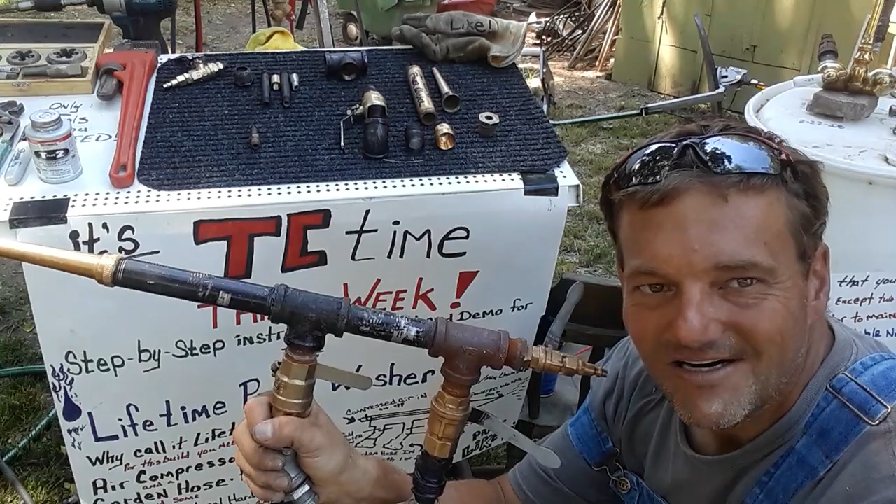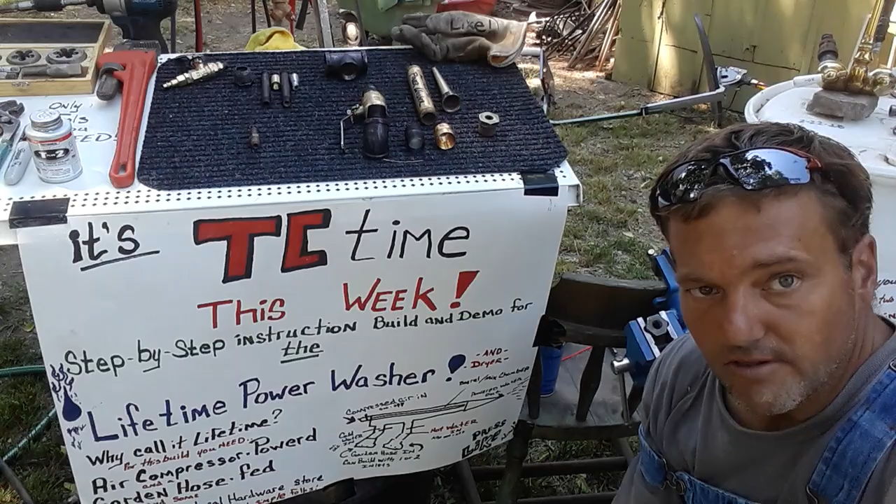Last week, you guys got to see me do a demonstration and a brief description of the build of the power washer that I've made. It works off an air compressor. Well, I decided this was a little bit too complicated for just anybody to want. It's kind of heavy. So I went back, I've stepped it back just a little bit, and this time I'm giving you a step-by-step, detailed instruction on how to build this thing. Step by step. It's going to go quick. I'm not going to do a lot of talking.

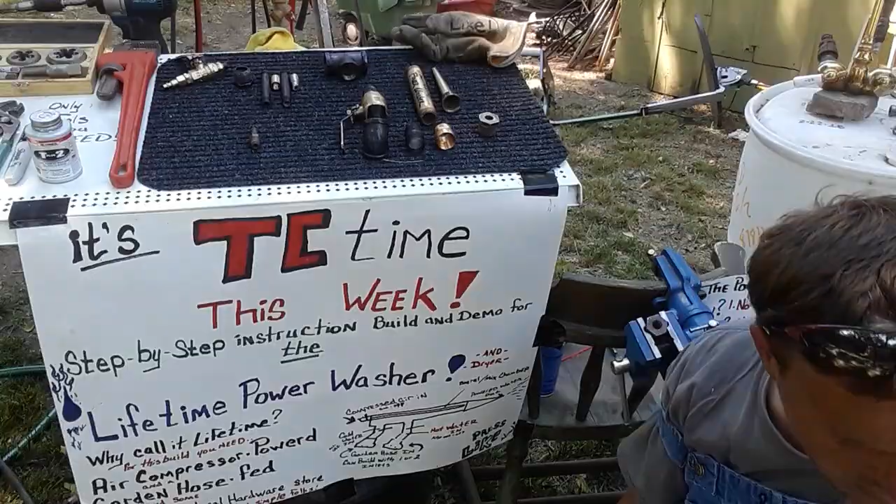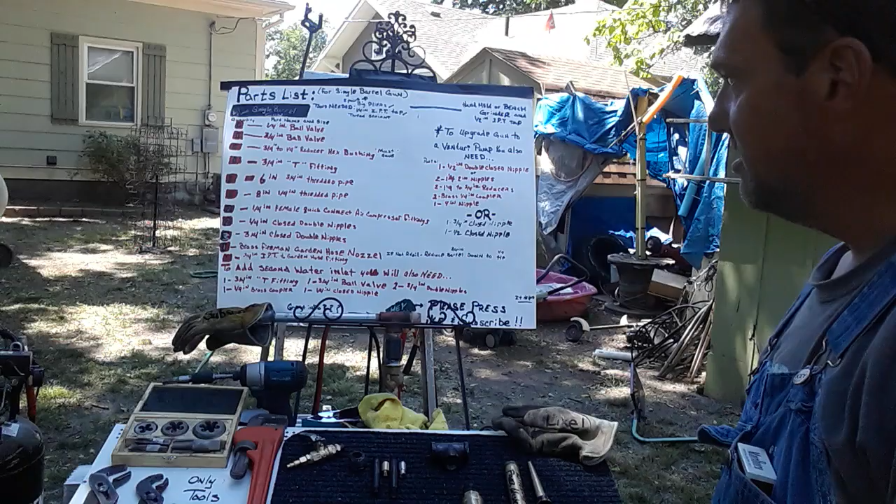Alright, as you see, I've made a parts list. As we put things together, we're going to go ahead and check them off the parts list. This is everything that you need, this side of the paper, to build the power washer. Alright, let's get started. It says first thing I need is a 1/4 inch ball valve. I have a 1/4 inch ball valve right here.

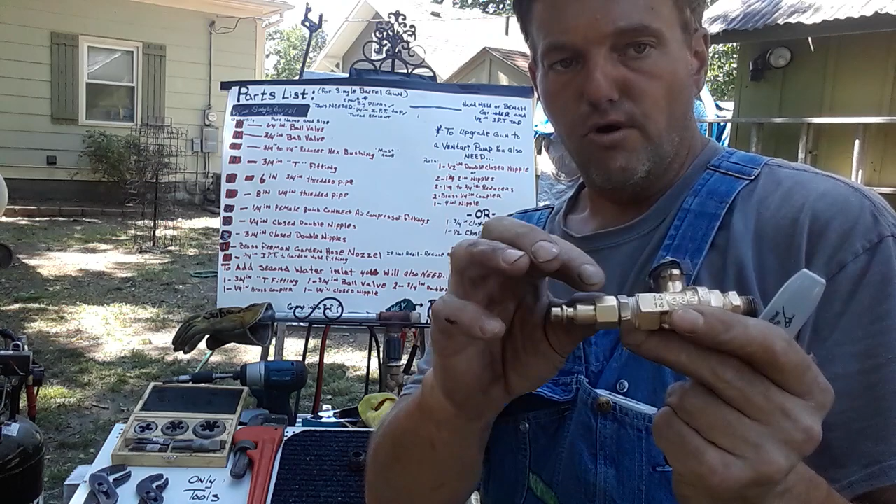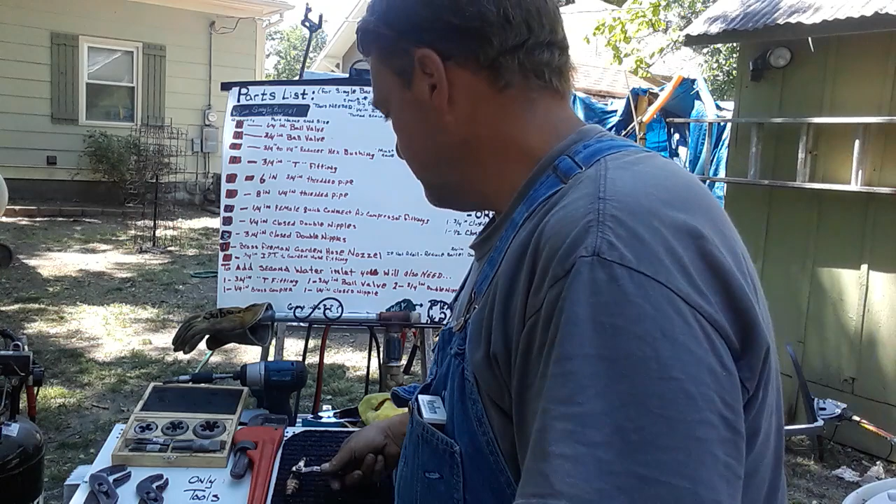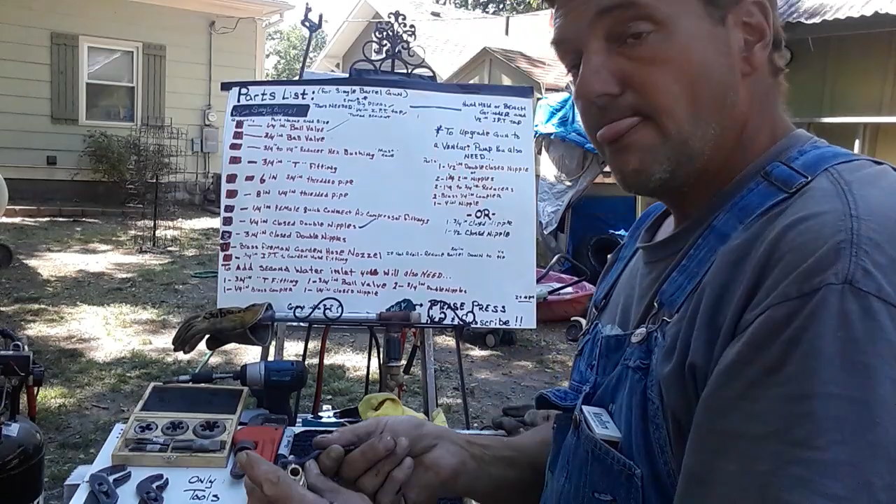I went ahead and screwed in my two 1/4 inch fittings to each side, my 1/4 inch double nipples, so I could screw on an air chuck and screw it into my gun. So let's go ahead and check off all that. There's my 1/4 inch ball valve. Closed double nipples. And that's it. Alright. So we have that. That's going to be how you get your air to your gun.

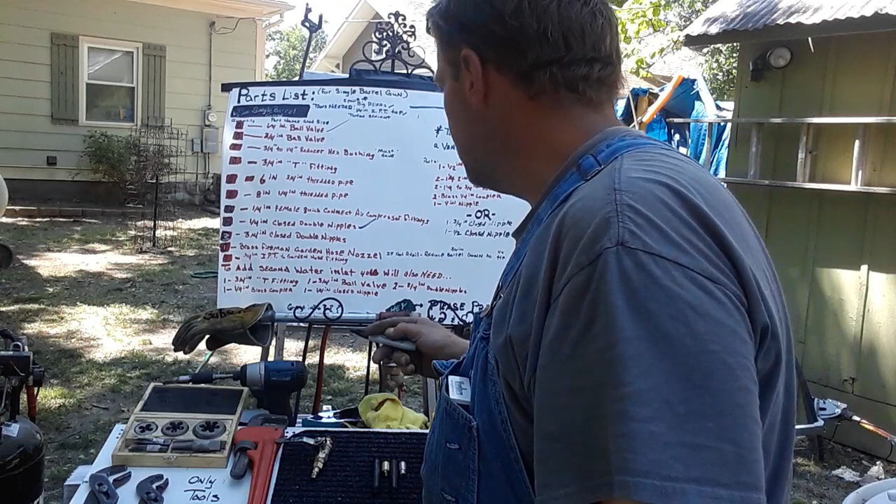The next thing that we're going to need is a 3/4 inch to 1/4 inch hex bushing. This is what it looks like right here. Okay, let's go ahead and check that off the list. Right here. This is a must-have. If you don't have this, you can't make the gun.

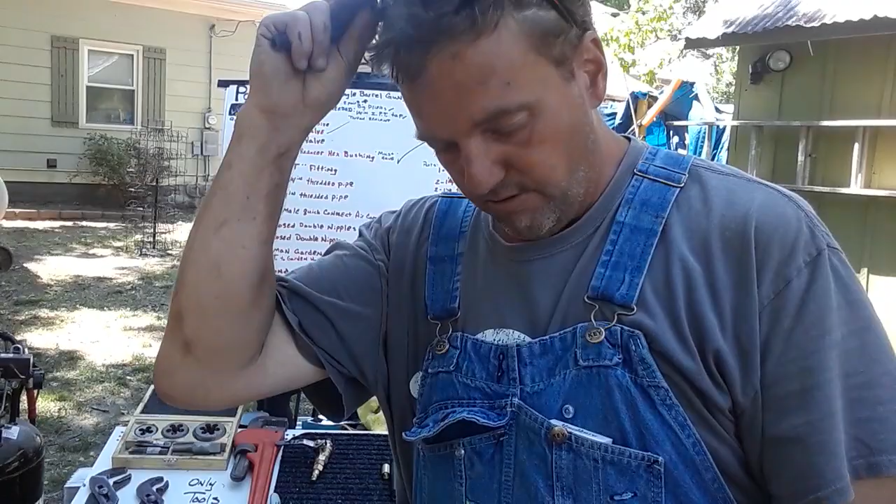All right. Now then, if you don't have a tap set already, you can go to the parts store, pick you up one of these 3/4 inch hex fittings and a 1/4 inch nipple. If you'll go through the bin, you can usually find one that'll reverse thread. Just screw it in backwards. So anyways, if you can find one that'll reverse thread in, great. If not, then what you'll have to do is

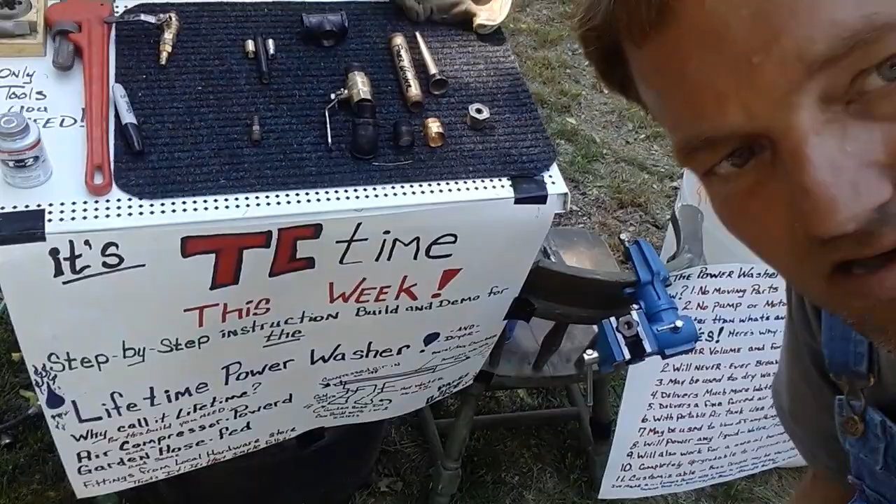Harbor Freight sells a 1/4 inch tap. By the way, this is a size 13 socket. I don't have a tap wrench, but this works great. And all I do is I'll start my tap in by hand to make sure that my threads are going to be straight. Once I get that in as far as I can get it by hand,

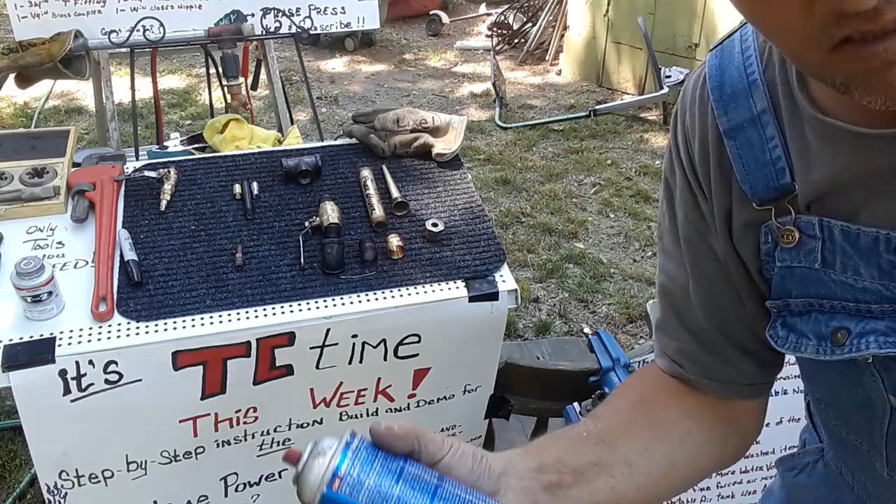take some of this cutting oil. Harbor Freight sells it also. It's kind of expensive, but it's worth it. Spray it on there. Connect your tool. Press the button. Okay, till it stops, then you back it out. Take it out of the vise. You don't have to go all the way through, you just have to get it to where it'll start.

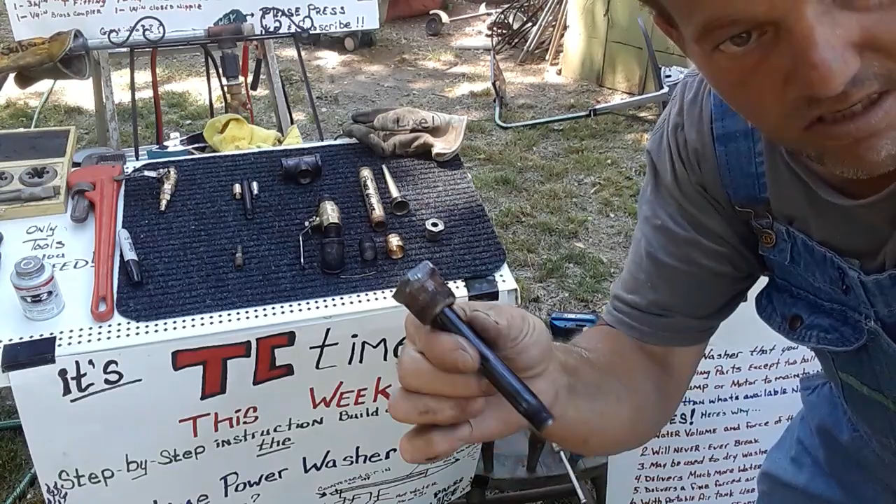If you have a tapered thread fitting on your hex bushing, this is usually all you have to do. And it starts the thread right in. Bam! Okay? So anyways, this isn't how it's supposed to go in there. It's going in there the opposite way that it was designed to go in there. So that's what the hex bushing is for, and I'm about to tell you why.

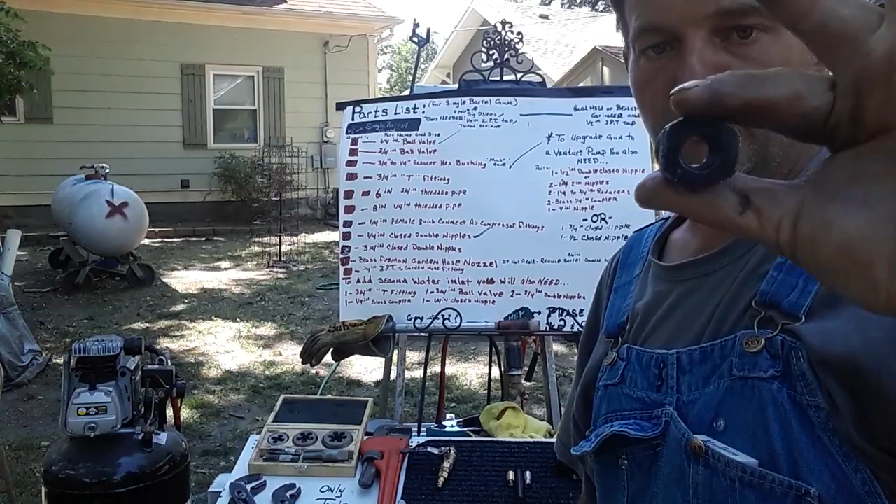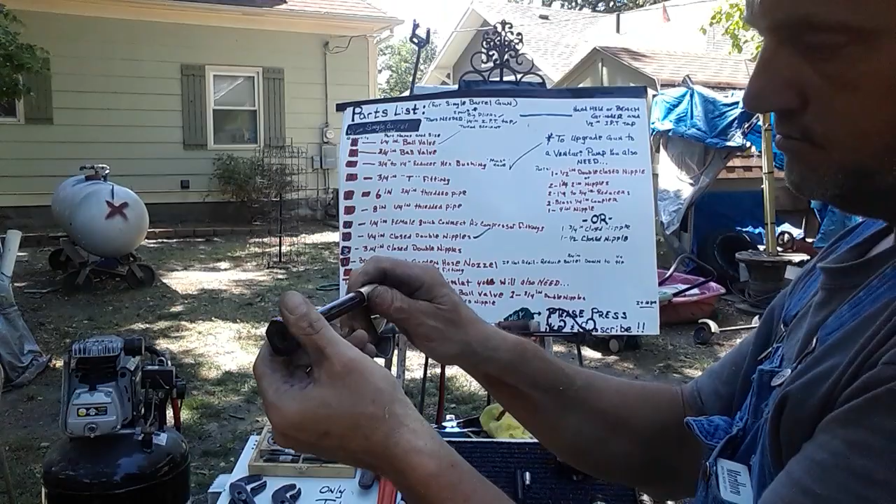Alright, now that we got our hex bushing, it's all tapped out, everything's nice and neat on it. Like I said, we're going to take our nipple with a tapered end and reverse thread it into the hex bushing backwards. Then we're going to put a coupler on here. Now, this is just a little cheap brass 1/4 inch coupler that I bought at Harbor Freight, and I filed the edges off of it so I'd have smoother water flow. Okay, then I'm going to extend it.

Now, I don't know if anybody's noticed, but I have not started putting thread sealant on my threads yet. The reason why is because this does not have to be all the way airtight or watertight. This is going to be what delivers your air into your gun.

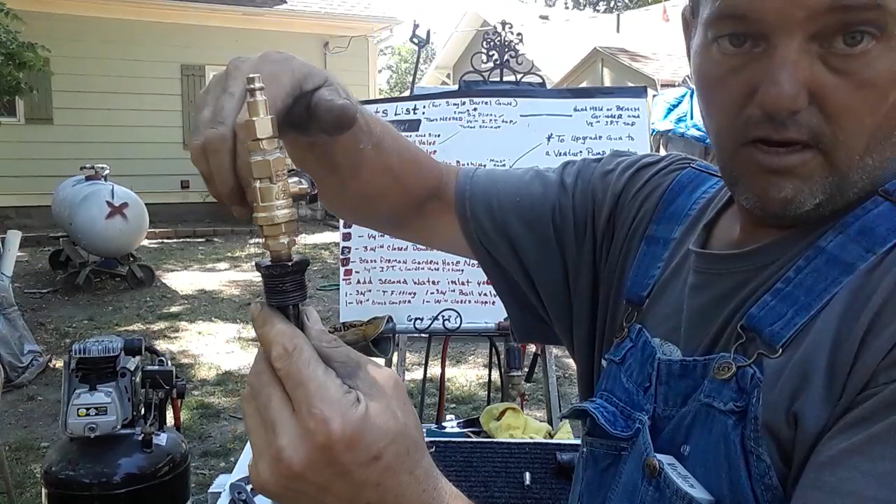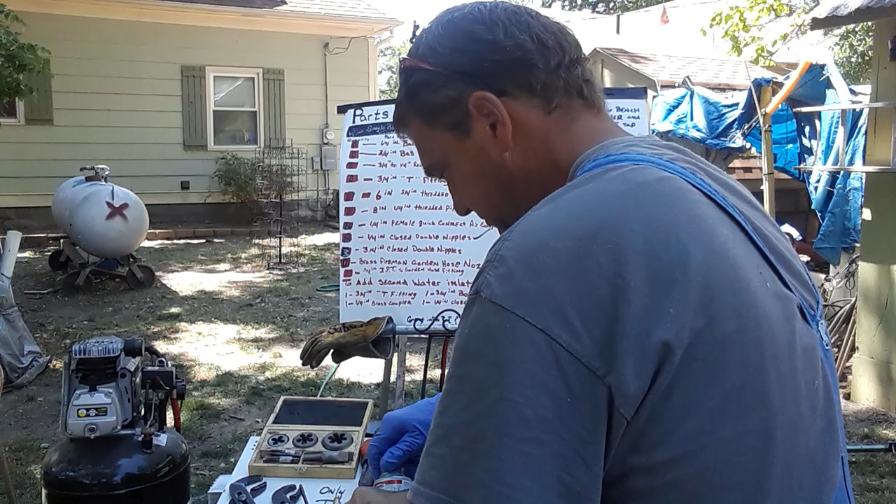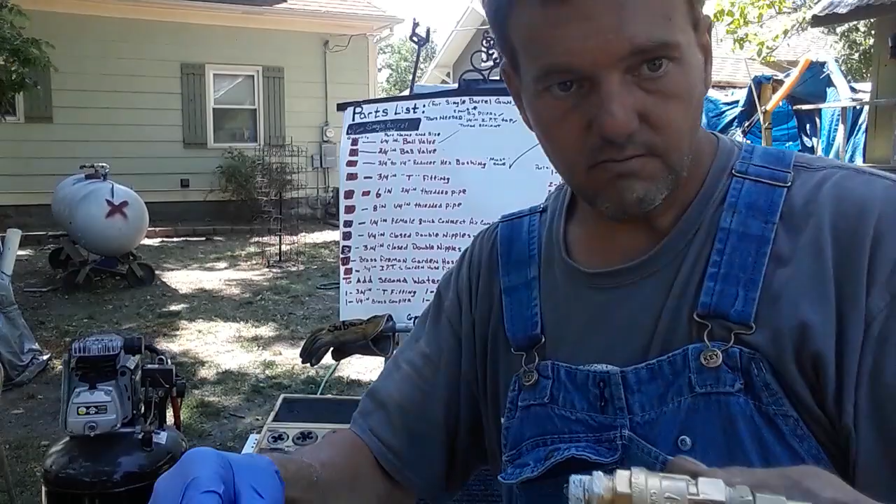Now, on the right side of the fitting, the one that they made for you to screw stuff into, take your 1/4 inch ball valve that you just put your nipples on and screw that in. We do need thread sealant on this. I just put a little dab on there and rub it around with one of these gloves on so I don't get it all over me. And I just screw it in. Screw it in as tight as you can get it. Then take your rag and wipe off your excess thread sealant.

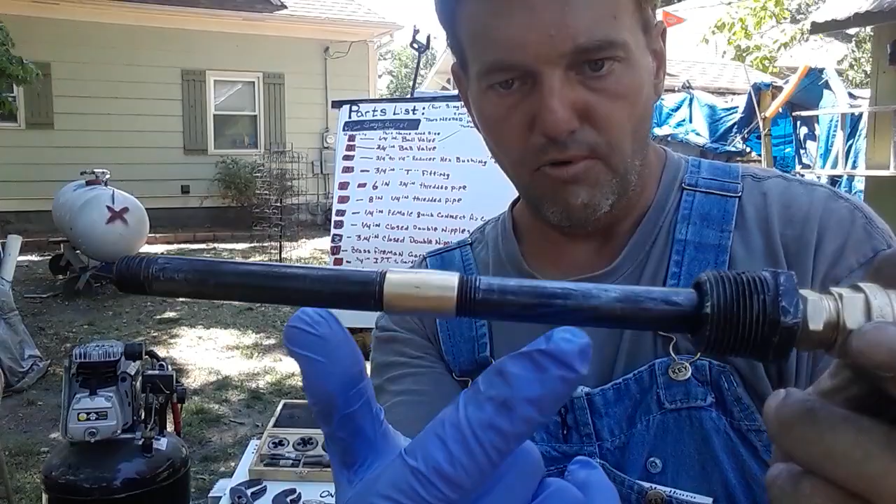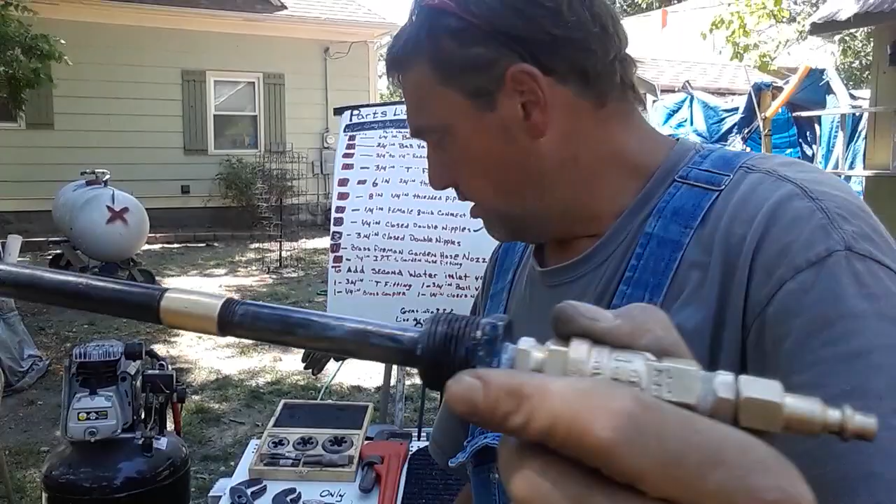Okay, so now we've got a quarter inch air quick connect going to a 1/4 inch ball valve, going to a 1/4 inch hex bushing, screwed in the wrong direction from the other side is another 1/4 inch nipple coupler, another nipple. Now the reason why I have two of these nipples is because the inside barrel, this is your inside barrel, this is the engine of your gun. It's going to have to be the same length as the barrel of your gun.

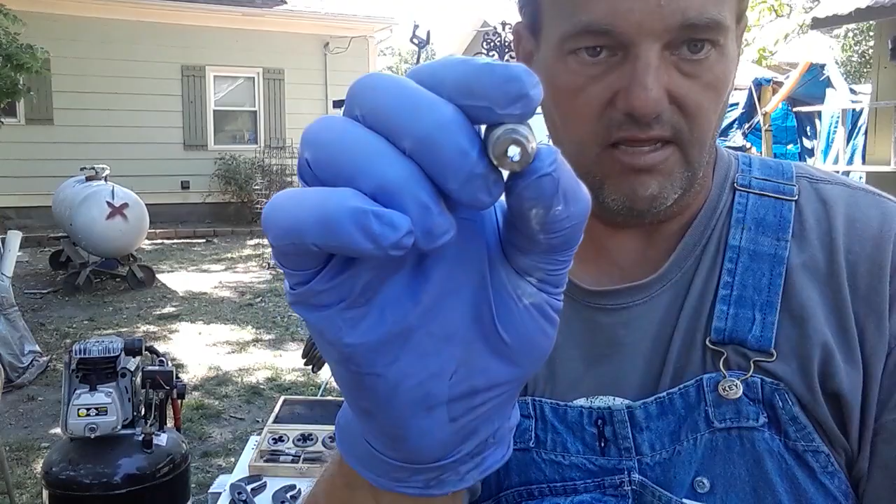Okay, so if I need a little extra length, I've cut off a 1/4 inch air fitting, because a 1/4 inch hole starts from 1/4 inch and goes down to 1/8 inch. So I can reduce it one more time and get a little extra length if I need it. I'm going to set this to the side. Also, if you'll notice, I cut it off at an angle. What will happen is that this will actually point the direction of the air upwards, which will help the Venturi effect if I use it.

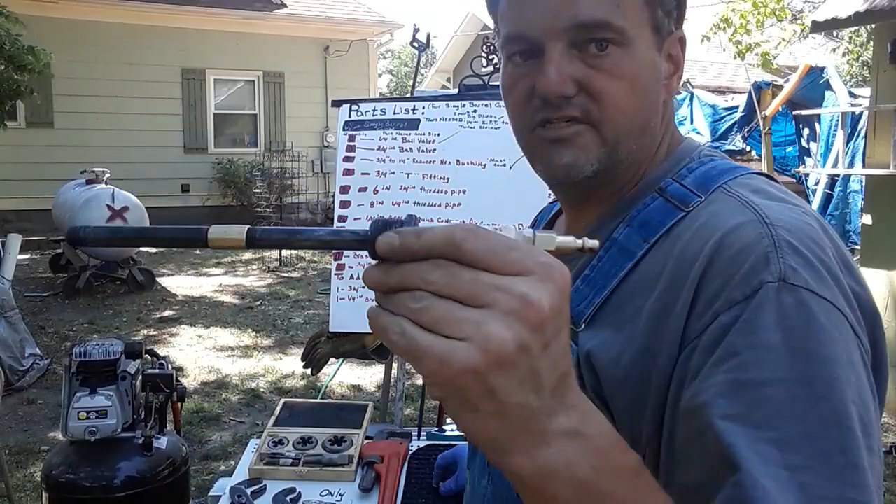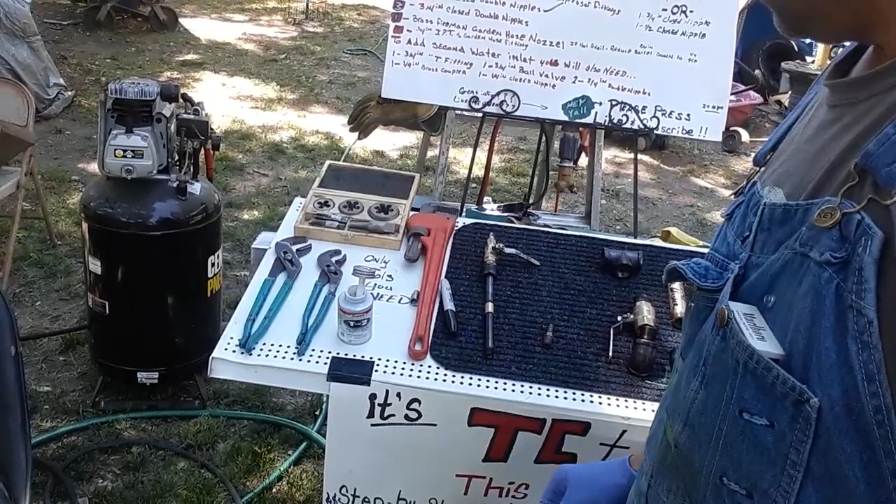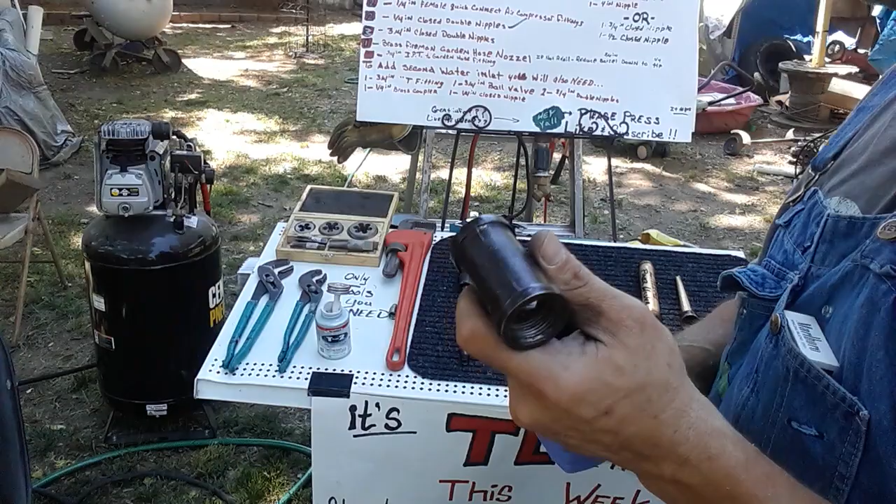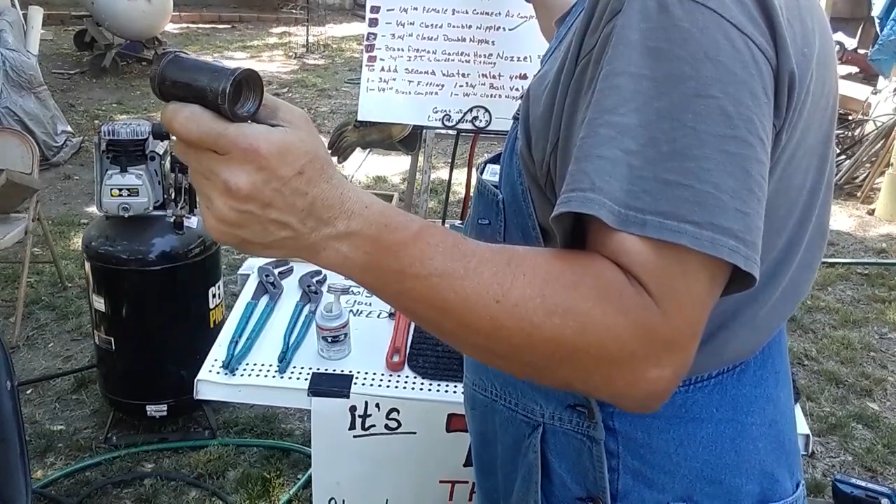Alright, so we have this built. This is complete. We're going to set this to the side. Okay? That's complete. Alright, so the next thing we need to do is pick up our T fitting. Now let's make sure that we got everything checked off here. Here's our 3/4 inch T fitting. Quick connect air compressor fitting we already got. 1/4 inch brass coupler, and the closed nipple, and that was actually 2 on that one. Alright, so we got all those checked off. So now we're down to the T fitting.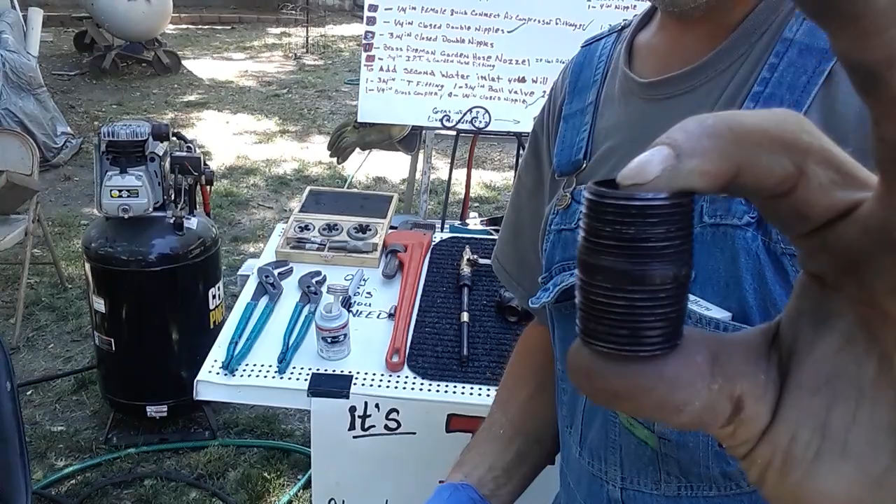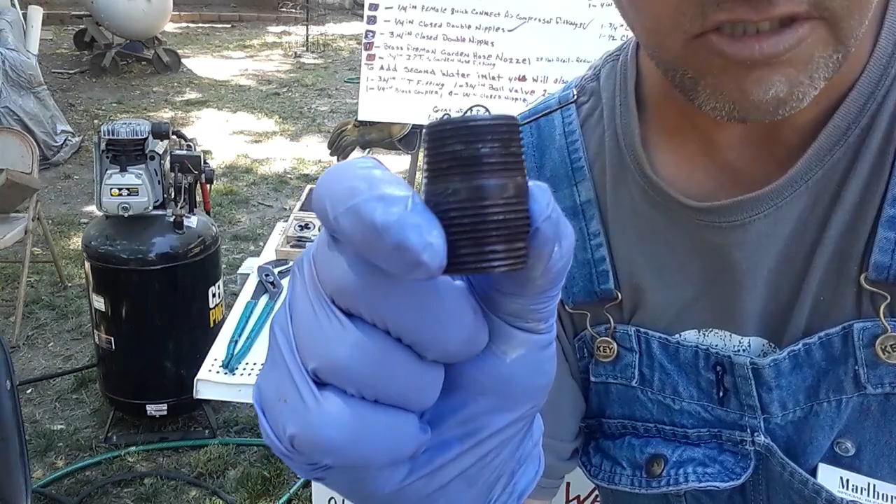Back to your pipe sealant. Into your T fitting, you're going to take a 3/4 inch closed nipple. Now you can get the ones that are all the way closed, or you can get the ones that have a little ring around the middle. I like the ones with the ring around the middle because I can grab a hold of it with a pair of pliers and not damage the threads. Okay? So I'm going to screw that into my T fitting on the bottom side first, after applying thread sealant.

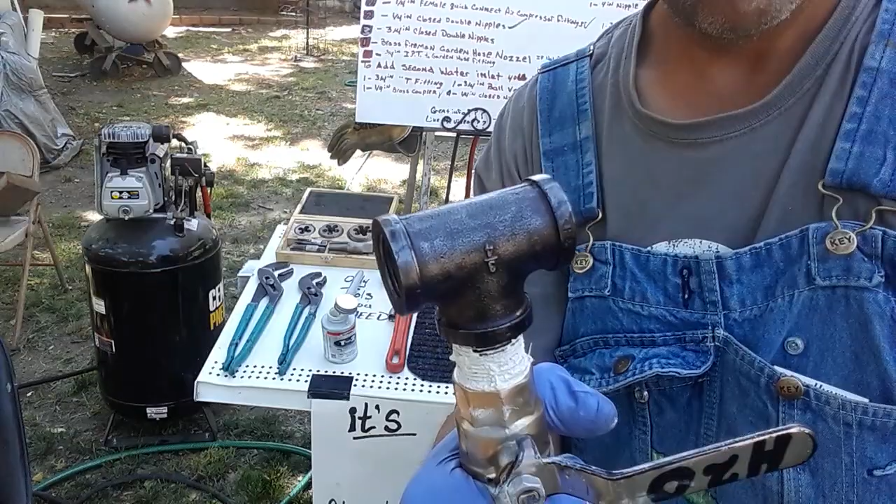Okay, I'm not going to worry about wrenching that down all the way just quite yet. Now I'm going to apply thread sealant to the other side of the nipple. Here comes your ball valve. This is so you can control how much water is going into the gun. You're going to want your lever to your ball valve on the side whenever you're done screwing.

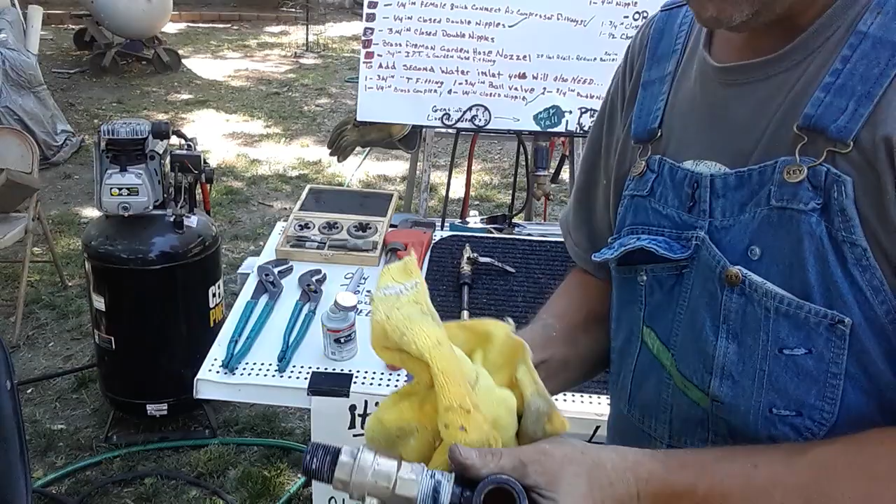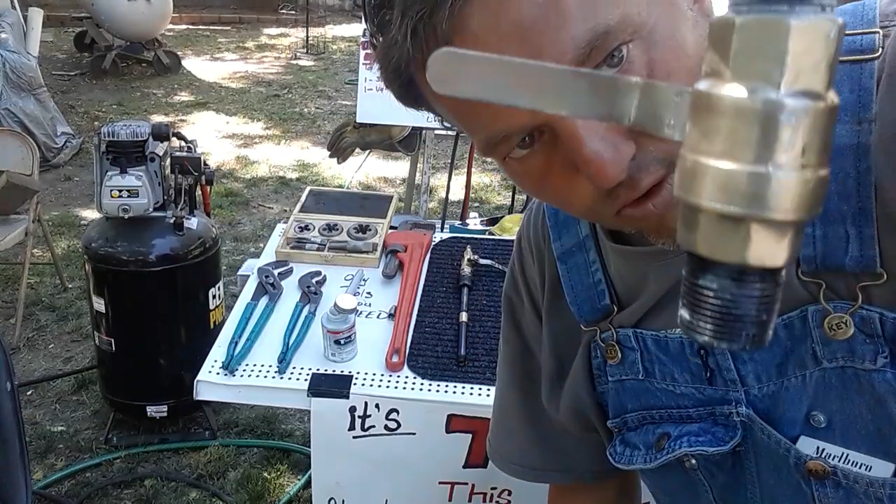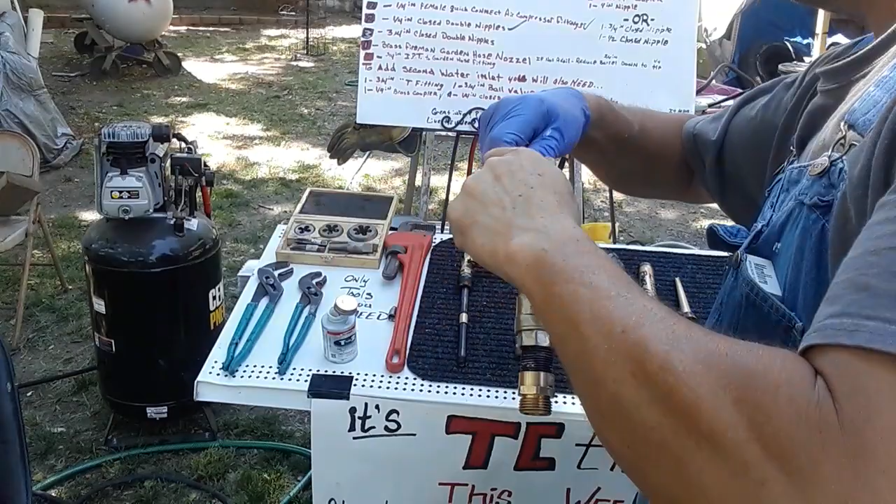All right, now I'm pretty sure that I did not include this on the list because this is optional. This is an ergonomic thing. I like this better for myself. At this point, I usually put a 45-degree elbow with a 3/4 inch close nipple on it, right underneath the nipple on the valve. But you don't have to do that, and if you're concerned about cost, at this point you can just simply screw on a 3/4 inch iron pipe thread to garden hose adapter. But I'm going to put mine together the way I want.

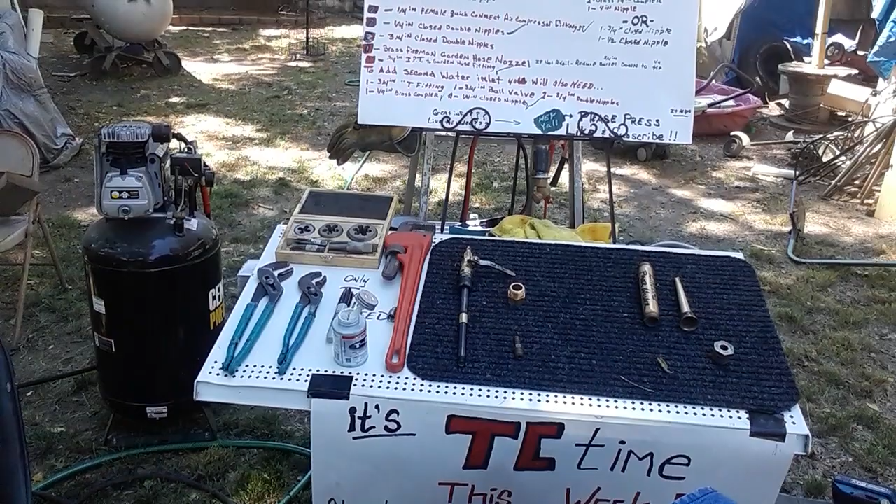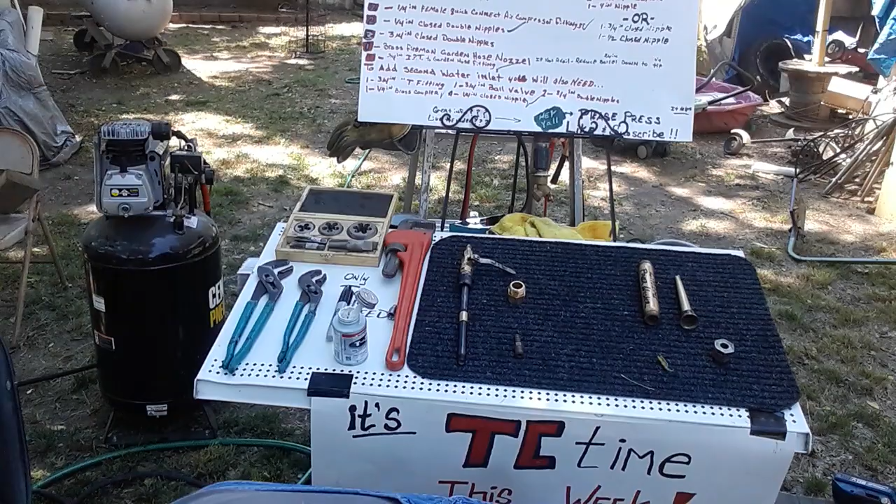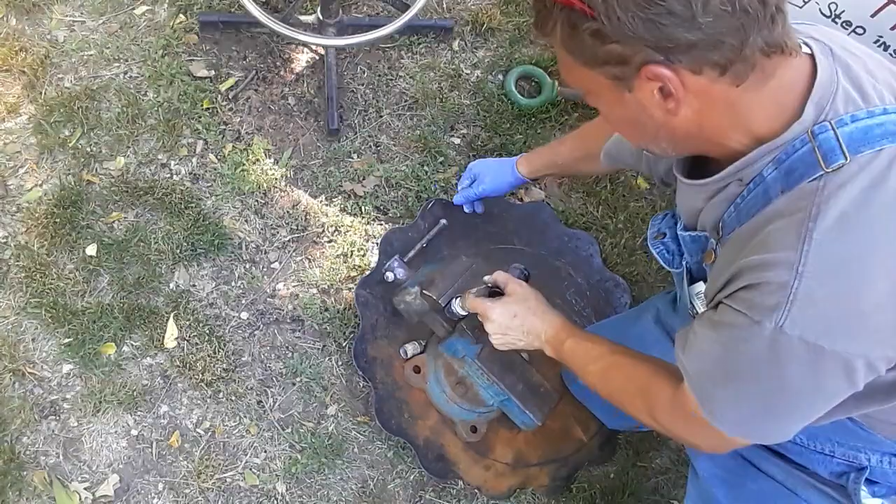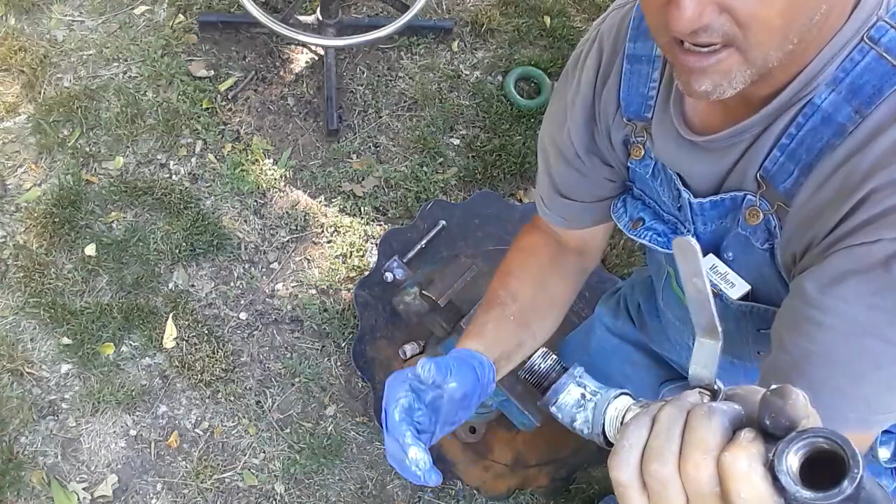So, thread sealant. 3/4 inch 45. Okay, I'm gonna want to turn this a little more, so I'm gonna put it in a vise. At this point, this is how you want it lined up. You want your T-fitting straight, you want your valve handle on the side, and you want your 45-degree angle pointing towards the back. Time for more thread sealant.

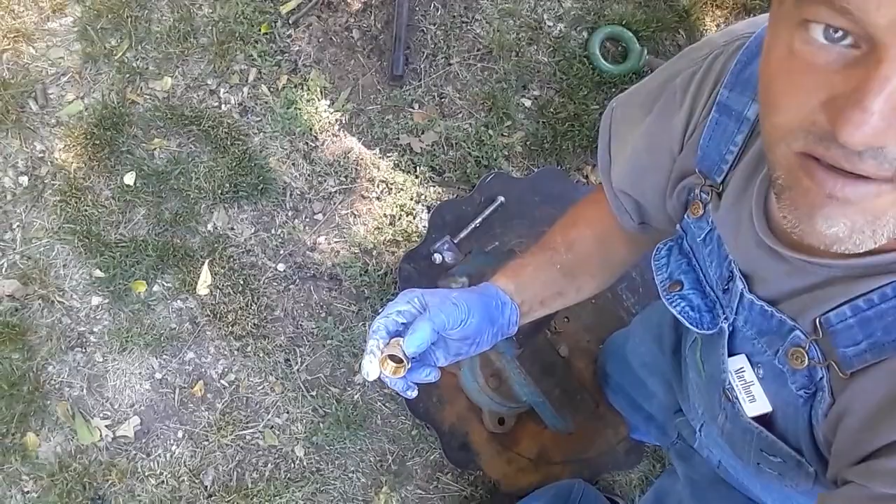Okay, at this point, we're going to screw on our brass garden hose adapter. The reason I buy the brass ones is they're harder and they don't bend and they don't get out of shape. They're machined instead of cast. They're just all the way better. I always choose to put a male end on mine. Even though the end of your garden hose is male, I choose to use a male end, and I'll show you in a little bit why. The reason I choose a male end is because there's no moving parts on a male end. The female ends usually have a ring that turns. It's a moving part, something to wear out, something to have to replace.

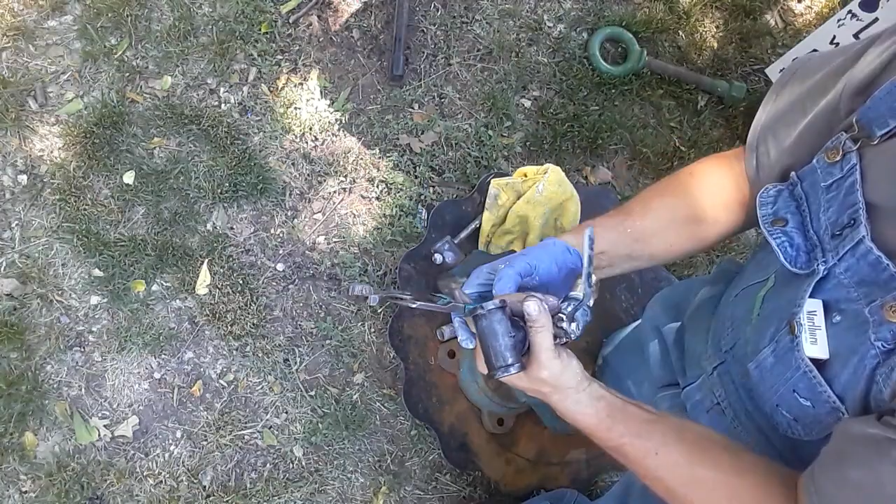And I'm just going to give this a nice quick turn just to make sure, because I don't want any water to get on me. I'm losing it. Alright. That should be plenty good right there. Alright, back up here.

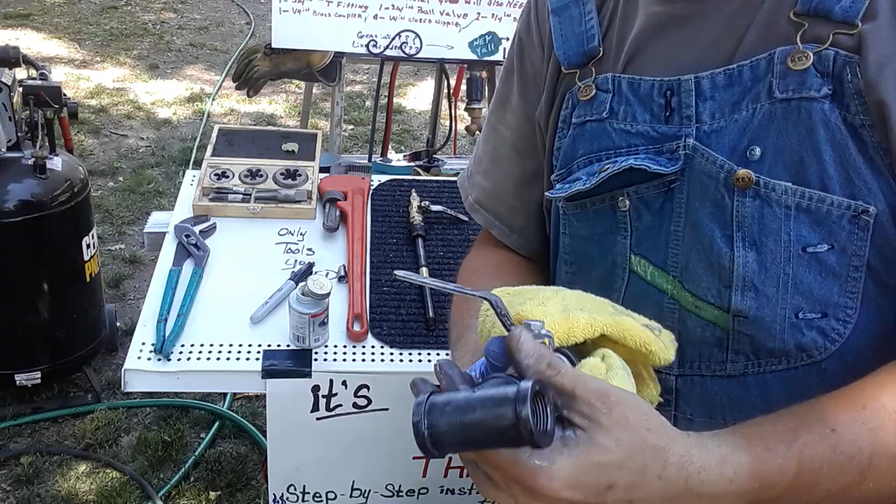I will say that none of this is important. The lengths, the size of your valve, none of that, if you change up something to make it fit your hand better, say you want to get a longer nipple, or you want to spend less money on a ball valve and get a PVC ball valve, or whatever you want to do, the lengths right here are not important at all whatsoever. You can make this look however you want, as long as it goes into a T-fitting, a way to turn the water on and off, and a way to hook up your garden hose.

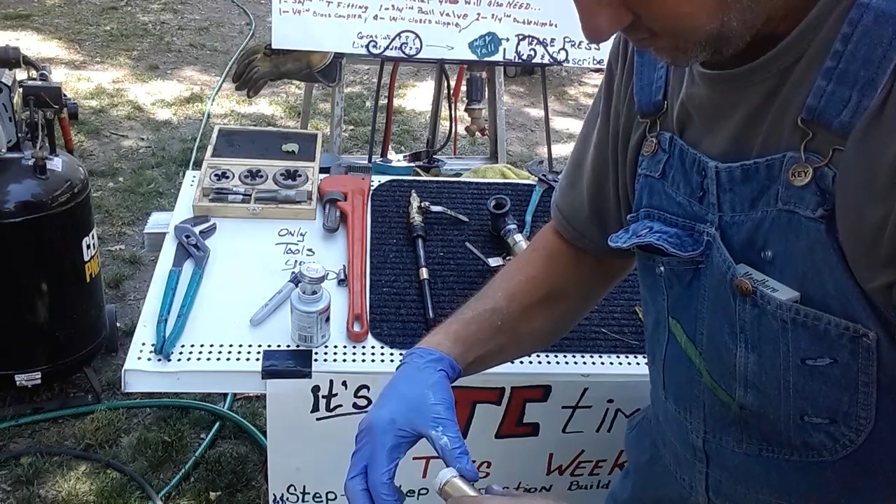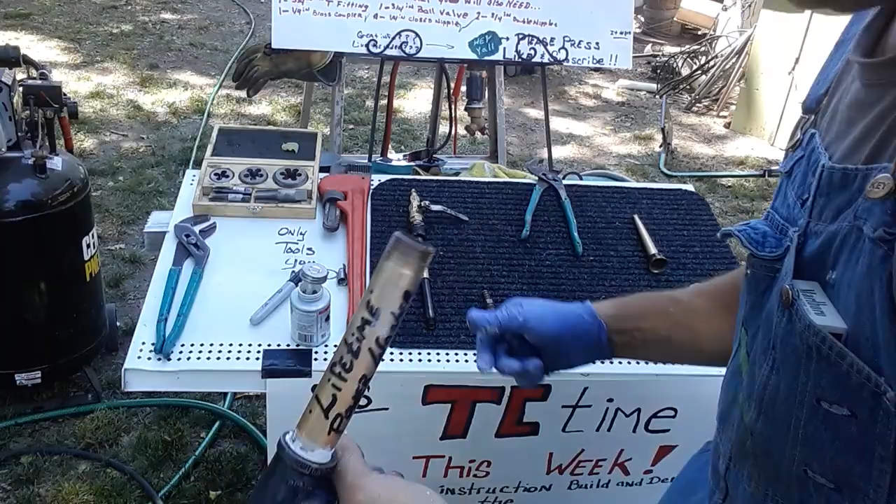Alright, now we're going to put on the barrel. All of this is going to be important. Okay? So, on the barrel, pipe sealant. You'll notice the garden hose fitting is facing towards the back, and I'm screwing the barrel in towards the front. So this is going to be the front, this is going to be the back. Okay, then, since this is a nice brass pipe, found it on a hot water heater, I'm going to put a rag over it, and I'm going to tighten it just a little bit. Just make sure it's good and secure in there.

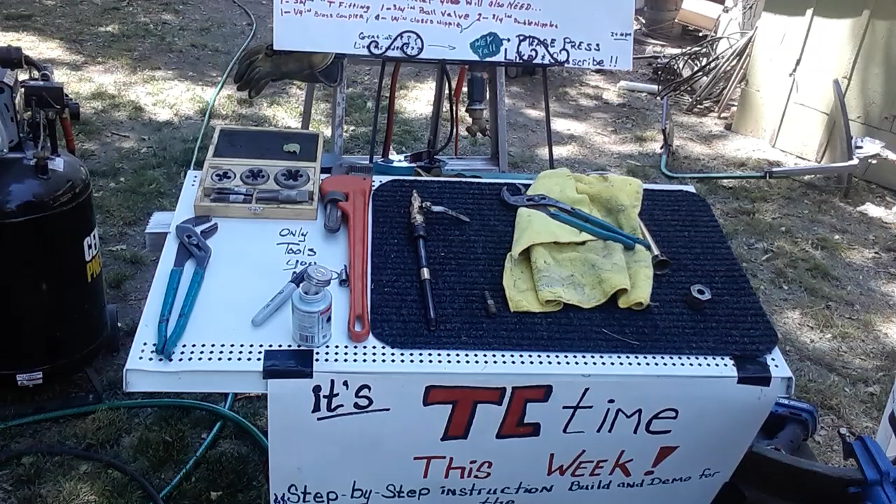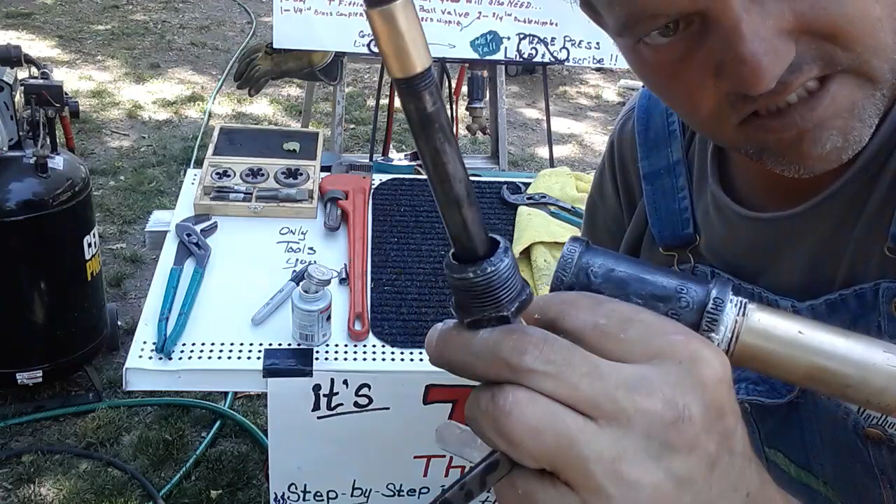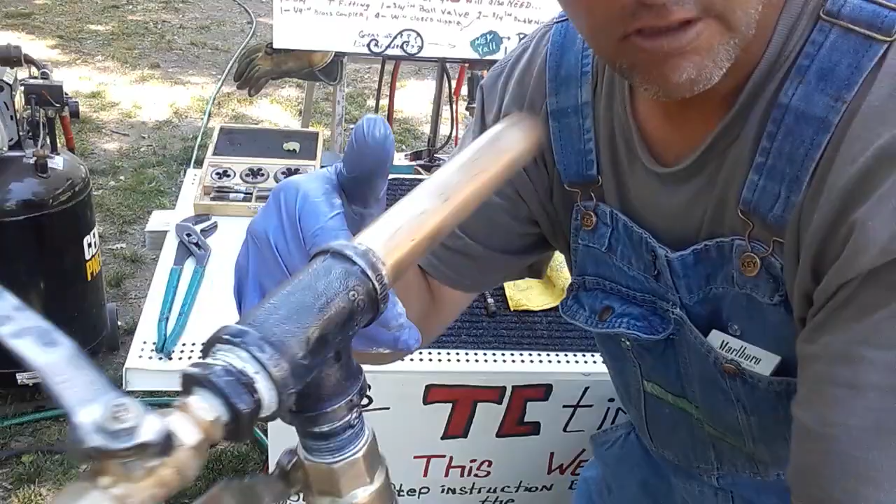Now, it doesn't matter where your handle's at on your air control. It's whatever's going to be comfortable for you. I kind of like mine on top like that. Maybe a little bit more. Okay, so we're looking like that now. Air control, water control.

Okay, we're just a little short. I don't know if you can see in there. But anyways, the inside pipe needs to end right where this stops. So it looks like I'm going to need this piece I made. I already knew I needed it.

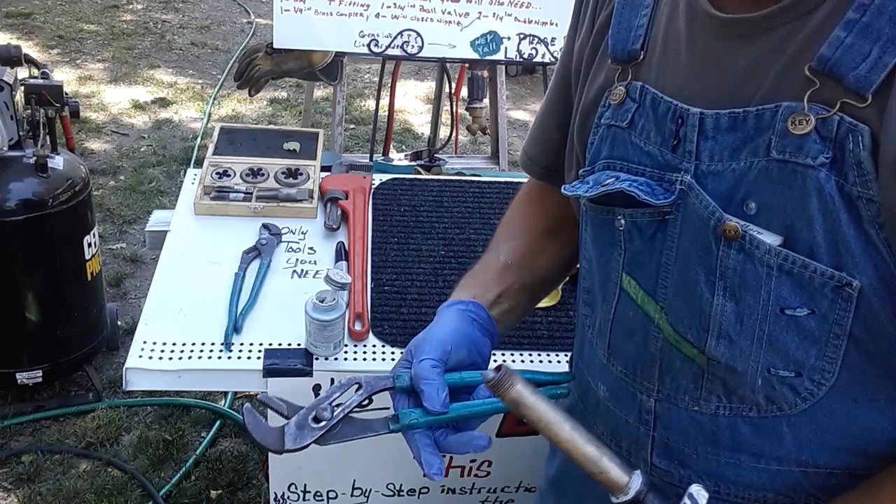Okay, remember we want that slant to go upwards on the inside of the pipe. So your air actually starts here, travels all the way down here, and then it comes out right there. It is not mixing with the water in here yet.

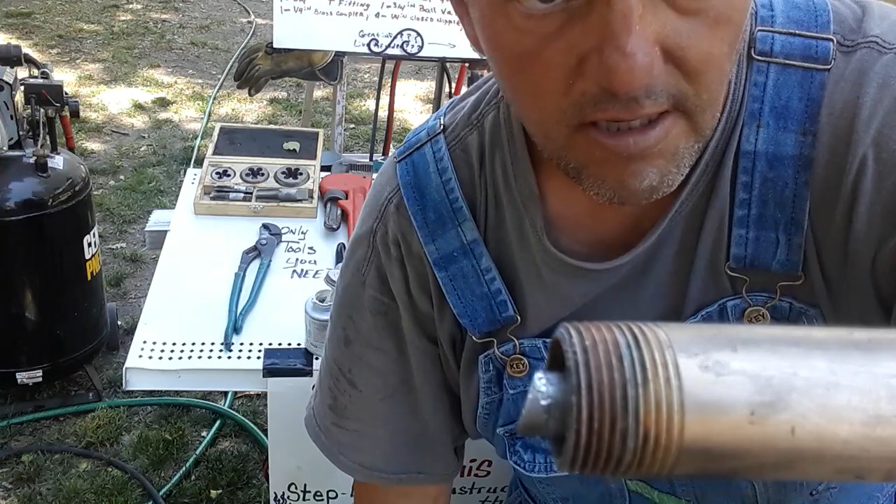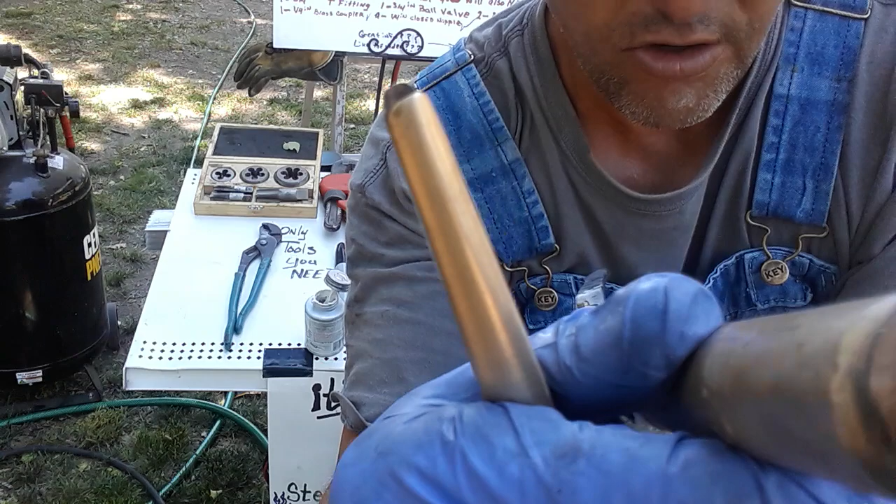Then you need a cone. Okay. Now it doesn't matter if you use a 3/4 inch to half inch to half inch to 1/4 inch reducer down to 1/8 inch, however small you want to go. The thing is you don't want your tip hole to be any smaller than your air hole that's on the inside. That's kind of important. You want them as close as the same size as possible,

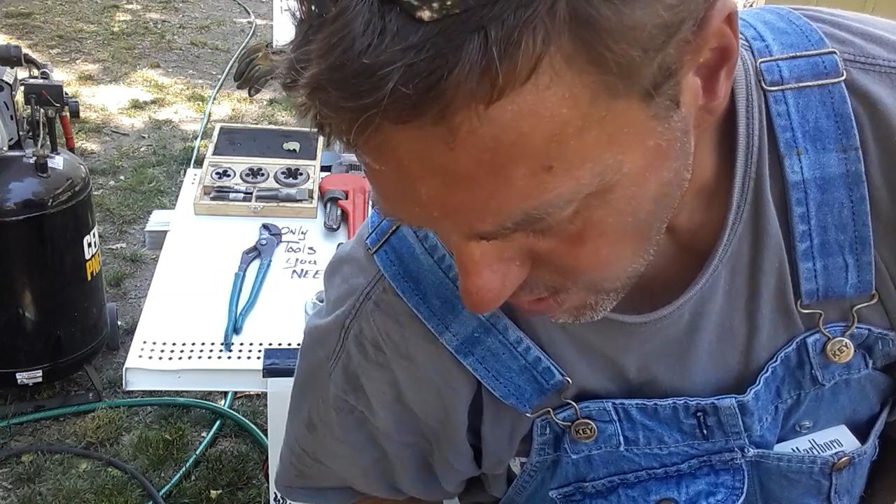and it's a good idea to put a slit down each side of your air hole because it allows your spray to go outwards like this. And if you was to push your tip down on something while it was running and the water and air was both on, it's got a place for anything to escape out the side so you're not putting air back into the city water system.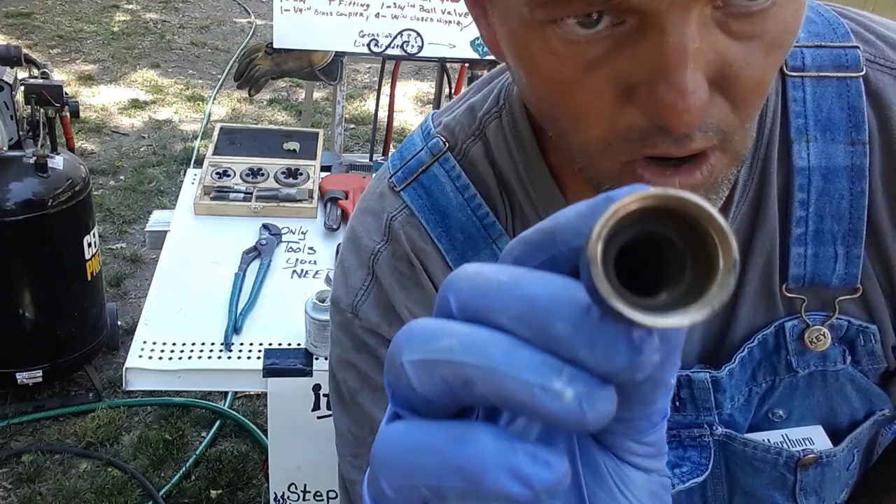Now, since this is just a garden hose fitting, it's got a rubber washer on the inside. I do not need to put thread sealant on this fitting. By the way, garden hose female fittings, they screw right onto 3/4 inch national pipe thread. I don't know why it doesn't go the other way, but it won't. But you can totally get away with it on going female garden hose to male national pipe threads.

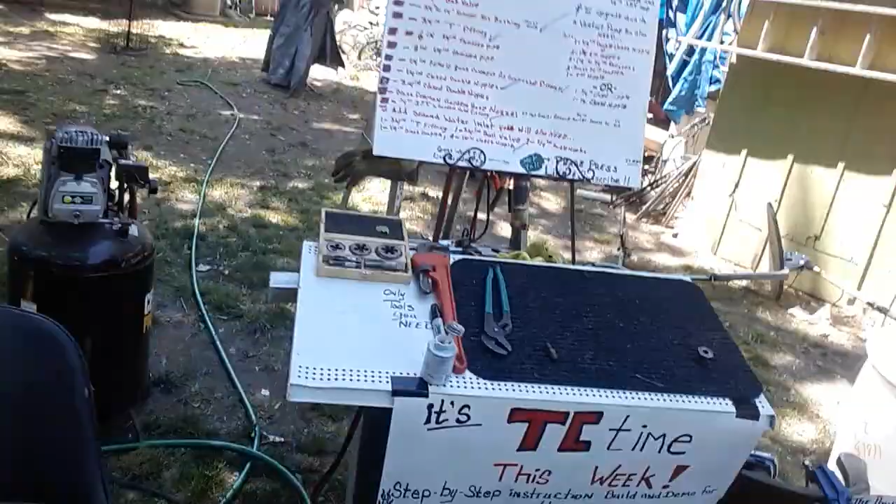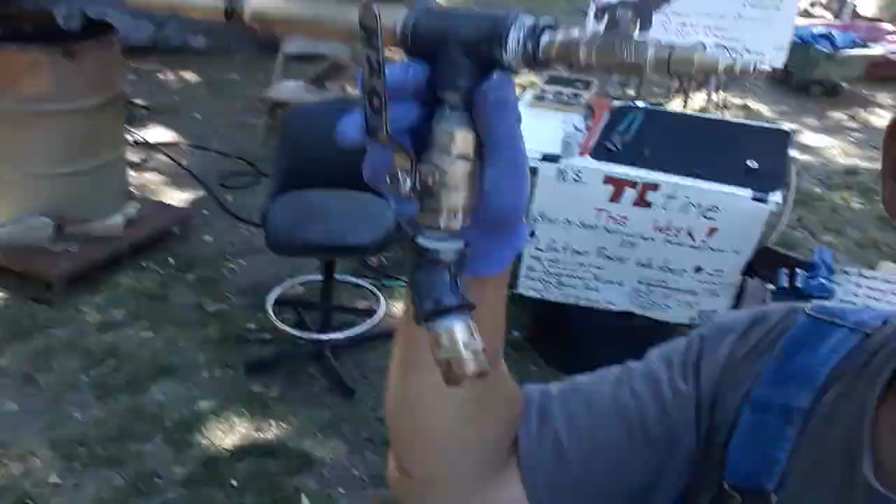And there you go. This is a completely finished, all the way ready to hook up to your garden hose and air compressor power washer. I'm trying to get in some good light here so you can see it. Isn't that pretty? I think I'm going to call it the lifetime washer, because if you build one of these, you're never going to have to build another one. There's no moving parts except for the ball valves. And if you have a fitting wear through for some reason, unscrew it and put another one on. It's that simple. So, lifetime power washer.

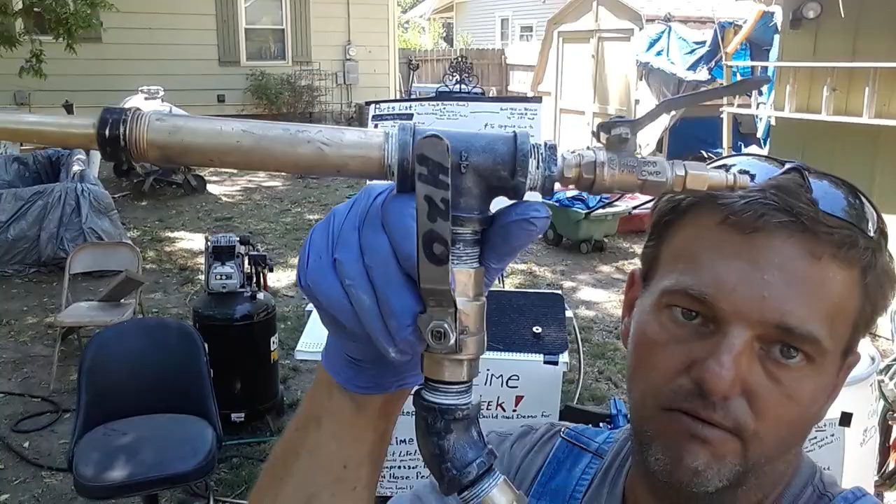If you have an air compressor, you have a power washer. Turn any air compressor into a power washer. If your wife wants a power washer and you want an air compressor, you can get yourself an air compressor and get this, and you're both happy and you both won. You can trick her into letting you buy an air compressor if you have this tool.

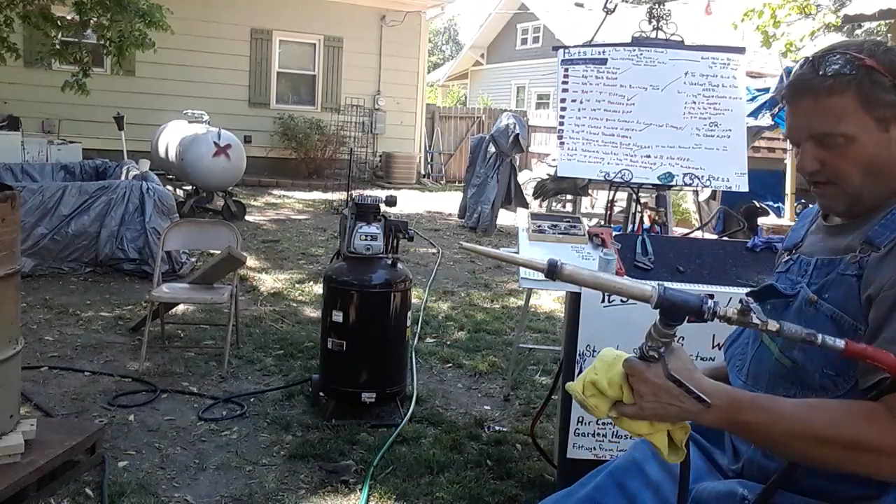Alright, so I'm going to try to pause this and hook it up. Okay, I'm back. I got it all hooked up. Now, I just have my garden hose connected here, and the reason why I put a male fitting on is because it seems like no matter how good of a garden hose that you buy, the end that they come with always leaks, gets stepped on, bent, something.

So I just take an old washing machine hose. It has a female end on both ends, and I go from the male end of my garden hose to the male end of my gun, and it keeps me dry, and it works a lot better. So I can control my water by opening up this valve. You can just use a little bit of water if you want to. We got a leak.

Alright, let's see what happens now. I must need a new fitting. Alright, so anyways, should put some thread sealant on this one. It's leaking a little bit right there. For demonstration purposes, I'm not going to stop and redo this because I'm not good at editing yet. That's what your water looks like all the way on, okay? Turn your air on, it's a whole nother ballgame.